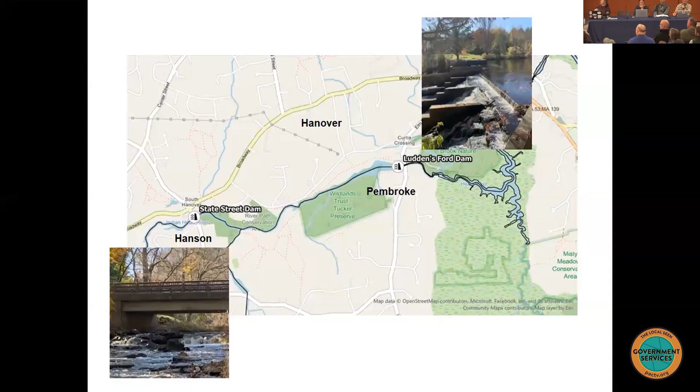So the goals of the Indian Head River Restoration Project, or IHRR, are to restore native fish habitat, to remove aging infrastructure. You see in this slide a lot more built infrastructure up at Ludden's Ford Dam than we do down at the State Street Dam. We want to look at reducing liability for dam owners. In this case, the towns are the owners of these dams - Hanover and Pembroke own the Ludden's Ford Dam, and Hanson and Hanover own the State Street Dam. We're looking to improve water quality, aquatic habitat, and natural riverine processes, eliminate ongoing maintenance associated with the dam and fish ladder, and increase resilience to climate change. These dams were not built to withstand the weather of today and the future.

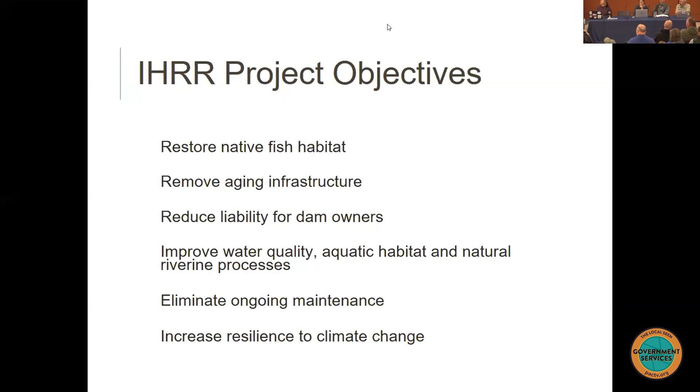So why dam removal, and why now? This started back in 2016 when the Ludden's Ford Dam had a phase 2 inspection report completed, and the result was that the dam was in poor condition. The town of Hanover, and I believe Pembroke as well, started having conversations about putting money towards repairing the dam. And it was a Hanover resident who said, well, what are we using this dam for? Should we look at repairing it, or should we look at potentially removing it, reconnecting the river, and restoring habitat? So that's when the Watershed Association became involved.

So these two dams are two of 3,000 dams in Massachusetts. About 50 are currently used for flood control, another 50 for licensed hydropower, and another 100 as reservoirs. Now these two dams that we're talking about - they're not used for flood control, they're not large hydropower dams, and they're not drinking water supplies.

So they fall into that other group of about 2,800 dams that really serve no purpose anymore. The industries they were built to support no longer exist, and so what we're seeing now are the negative impacts on the rivers and habitats. Across Massachusetts, across the country, and even across the world, organizations and governments are starting to remove dams.

This slide shows MassDEP's Department of Ecological Restoration project map. You can see in purple the completed projects, dams that have been removed. All the red are active projects, and the yellow are culverts. That's another thing we can do to remove barriers.

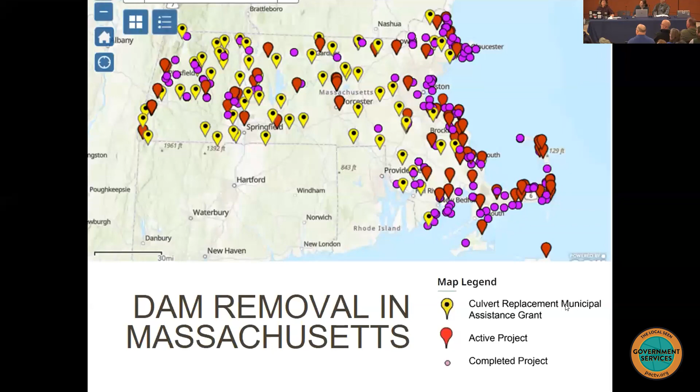Thank you, Alex. Remove barriers along the rivers. The problem with barriers along the rivers, once you lose those industries they were built to support, as I mentioned earlier, we have these negative impacts of the dams on rivers. This is a slide some of you may have seen before at earlier presentations, but let's quickly go through these impacts.

First, when you put this structure, right where the pole is, in the middle of a river, you turn that free-flowing river into a series of disconnected ponds. That blocks fish passage, so you can see the fish down there. We have our anadromous fish here in the Indian Head River, our river herring and American shad, that need to go upriver to find suitable spawning habitat but are blocked from doing that by these dams. We also have our eels and brook trout that use the river for passage and can't do that with the dams.

These ponds behind the dams are impoundments, just bodies of water that sit there, so the water temperature increases. That has all sorts of impacts on water quality, both lessening of oxygen and increasing algae, and it makes it a really difficult place for those animals and plants to live.

And then finally, you can see that yellow bar on the left there - traps. The dams can trap sediment behind that structure, which covers up the riverbed that can be used as habitat, and it can also increase concentrations of contaminants in the water body itself.

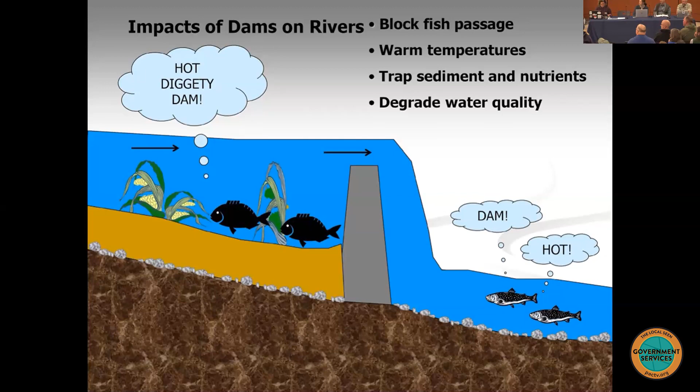The other reason we're looking to remove these dams now is because we have funding, through this phase of the project, through MassDEP's Natural Resource Damages Fund. This fund was put together to restore habitat that was impacted by contamination upstream at the fireworks site. This money can't go toward cleaning up the fireworks site, it can't go towards dam repair - it can only go toward habitat restoration.

I mentioned the fireworks site, just to address the elephant in the room, at least for some of us, which is the potential designation of that site as a Superfund site. What we know is that whether or not that area is designated, makes it onto the NPL list, or is designated as a Superfund site, that's not really going to affect the mechanics of these dam removal projects. What you'll hear Sondra present in terms of how the dams will be removed, what they'll look like after - none of that will change as a result of the potential Superfund designation.

What will change and be impacted is the timeline, as we try to understand if the potentially responsible parties upstream are deemed responsible for the contamination we're finding in the contaminated sediment behind Ludden's Ford Dam, which Sondra will speak to quite a bit.

I just want to close my section by reminding everybody we're here to talk about these two project sites - the potential impacts of removing Ludden's Ford Dam and the State Street Dam. We're not here to talk about the factory pond site, we're not here to talk about potential Superfund designation, and we're not here to assign blame to anybody upstream. We're here to hear the data presented by the consulting team and then make a decision with you, the dam owners, on what you want to do with these sites.

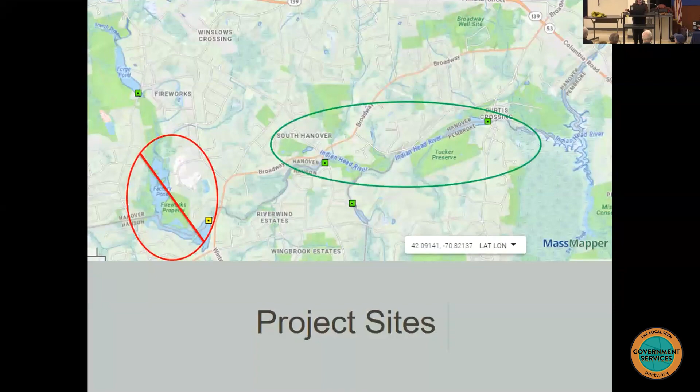I'm going to turn it over to Sam now to talk a little bit about the Watershed Association's perspective. Thanks, Becky. I'm just gonna - unless you can't hear me. Can you hear me in this thing? Yeah? I'm pretty loud anyways. You're not loud enough?

Sam, the camera's also facing the top. Oh, okay, I'll get up. I think Sondra's not going to. I'll get up. Okay, all right.

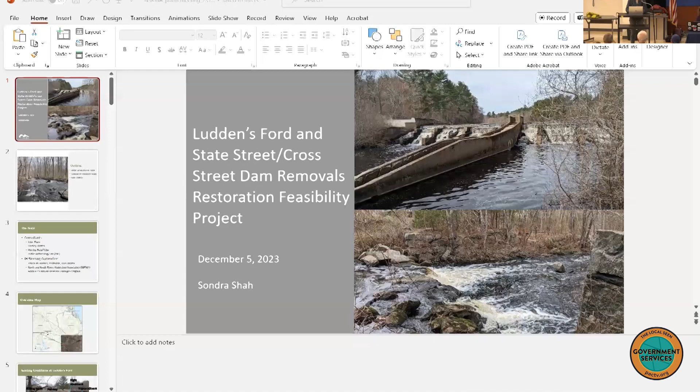All right, thanks for coming here today. My name is Sondra Shah. I'm an engineer with Inter-Fluve, and today I'll be talking to you about the Ludden's Ford and State Street Cross Street Dam Removals Restoration Feasibility Project.

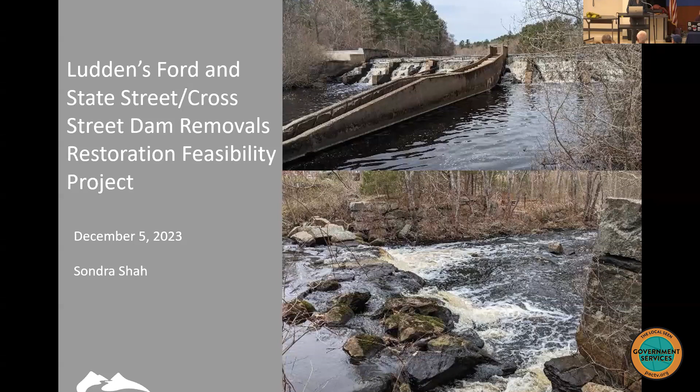We are here today because we have two dams that no longer serve a purpose. Along with preventing fish passage, they disrupt the natural temperature, sediment, and flow cycles of the river. They also pose a safety risk and liability for the towns. In this presentation, I'll talk about the feasibility of removing these dams, first discussing the work completed by the team, then the findings of the study with help from Neil at Horsley Witten, and then I'll give two case studies of completed dam removal projects.

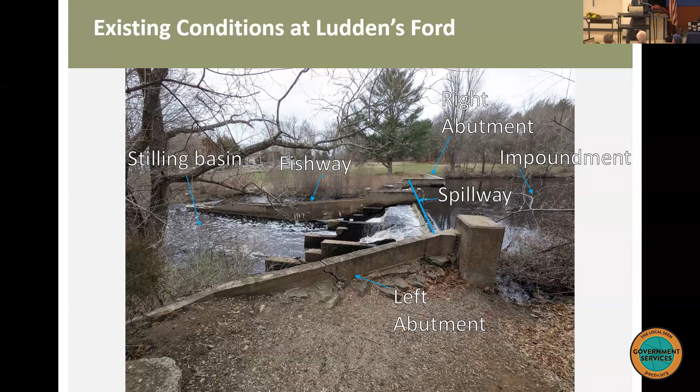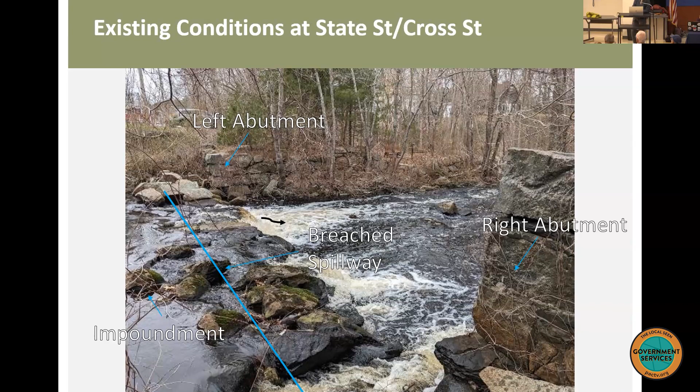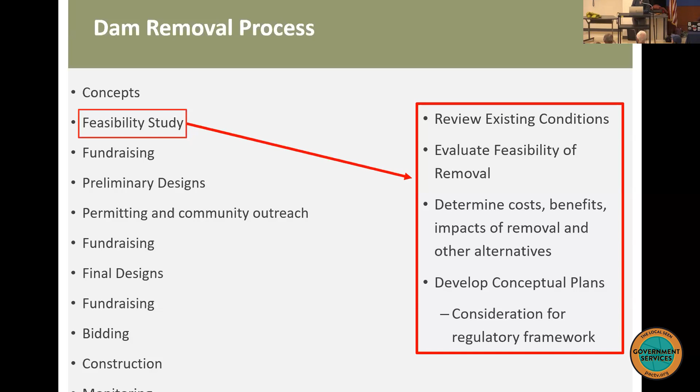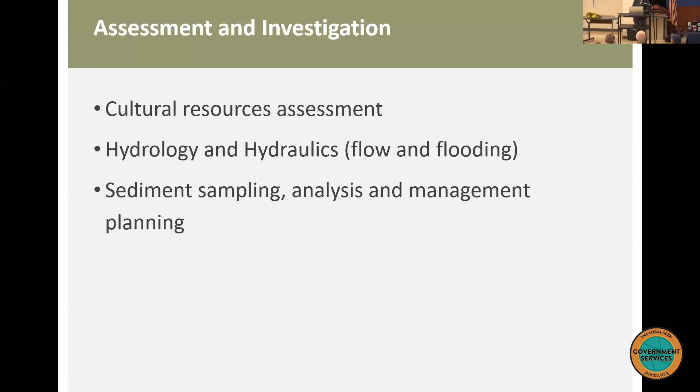Understanding the history helps us understand the current state of the dams and surrounding area, and informs us of anything else we need to be aware of as we design removal. In partnership with the tribes, we learned how meaningful this section of river is.

Migratory fish runs were staples to the Native American subsistence way of life and still play a major role in the culture. In the 1980s and 1990s, archaeologists from a nearby university discovered Native American artifacts on either side of Ludden's Ford Dam, both on the Pembroke and Hanover side. These findings give further evidence that this was a site where Native Americans congregated.

Starting in the late 17th century, European settlers began harnessing the river for a whole range of manufacturing industries. So the river saw a sawmill, grist mill, carding mill, tack and nail factory, ironworks forge, and a rubber plant.

Based on these cultural assessments, both sites are characterized as having high sensitivity for pre-contact Native American cultural deposits and post-contact industrial archaeological resources. The archaeologists we worked with from PAL did note, though, that the dam removals will have no effect on historic architectural resources, provided measures are taken to protect the Elm Street Bridge.

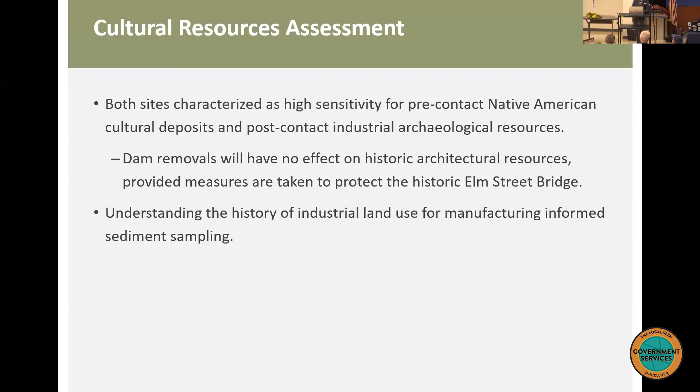The 2-year event means there's a 50% chance of that flood occurring in any given year, whereas the 100-year event has a 1% chance of occurring in any given year. So it's much more rare to see a 100-year event, but it has a 1% chance of happening.

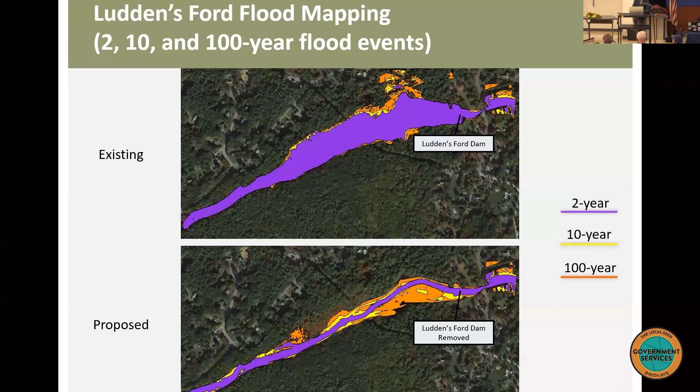So the overall takeaway here is that the dam removals will not worsen flooding downstream. The dam removal will reduce flooding around the Ludden's Ford Dam, and the dam removal eliminates the risk of flooding due to dam failure.

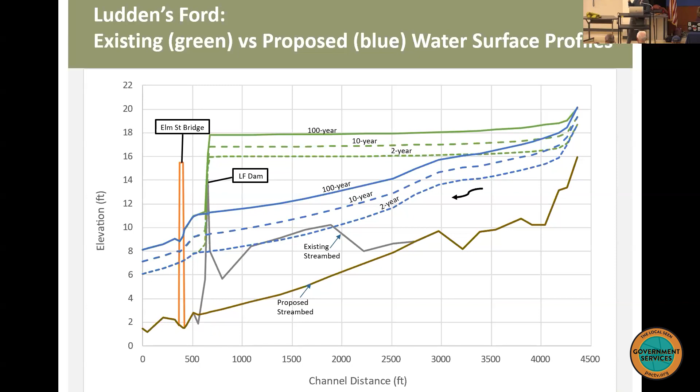So the green is existing and the blue is proposed. You see the biggest drop in flood profiles around the dam, and then there's less of a decrease as you move upstream. Feel free to ask me questions about that later.

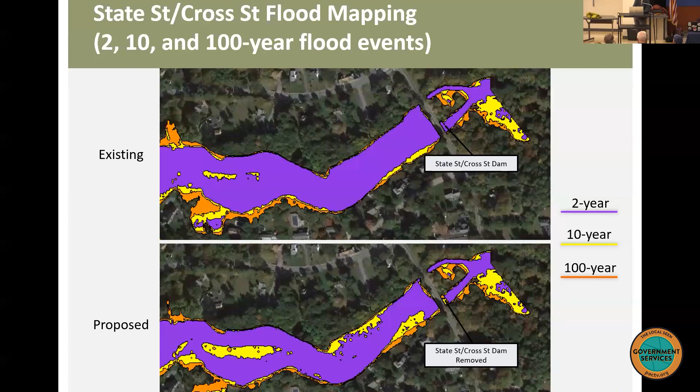And then here we have the same profile for State Street, Cross Street Dam. Like I said before, there's not as big of a difference between the flood profiles, but you do see a decrease. I also want to note that we looked at the velocities during the migration season to make sure that fish can pass upstream successfully.

And we also looked at velocities during big flood events to ensure that removing the dams don't pose any risks to infrastructure nearby.

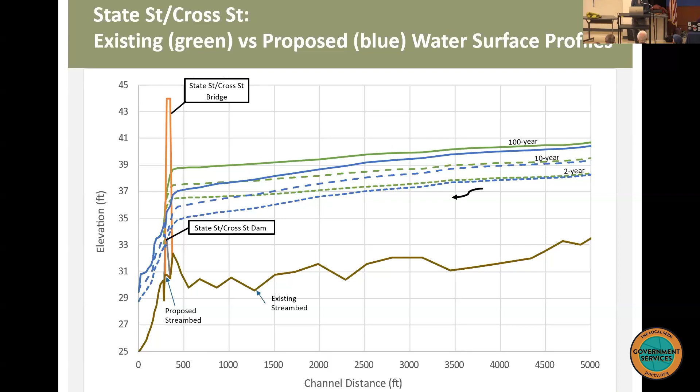So we often locate our proposed channel in the location of where we think the former channel might be. This kind of map also is important to estimate sediment quantities behind the impoundment.

And we didn't create a similar map for State Street because we found that it was mostly coarse sediment behind State Street, suggesting that most of the fine sediment was evacuated downstream when the breach occurred.

And now I'm going to hand it over to Neil to talk about the sediment sampling.

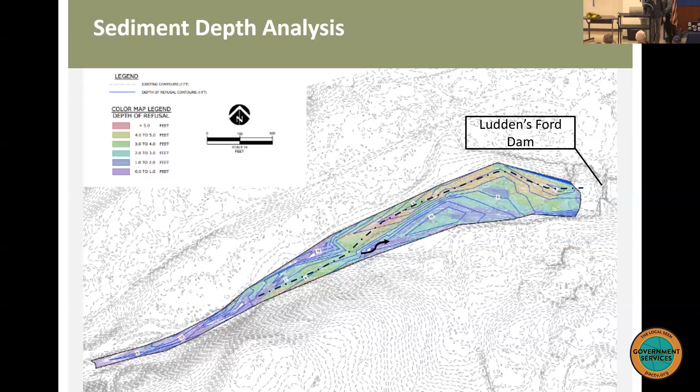Thanks, Sandra. Good evening, everyone. Pleasure to talk to you tonight about the sediment portion of this project. For every dam removal project, sediment is one of the driving factors that we need to look at carefully.

Perhaps most frequently one of the most important ones for what the cost of the actual removal may be. So like all of those, we looked at this carefully here. We developed a sampling plan for both impoundments based partly on what we call a due diligence review.

And what a due diligence review is essentially a review of the historical records of what might have gone on here in the past to give us a clue of what kind of contaminants might have been contributed into the river as a result of those past activities.

So we actually use a for-pay service. You give the money and they give you back a report that has a whole bunch of aerial photos, historic aerial photos, historic maps. Very significantly, these things called sanborn fire insurance maps, which existed for many years going back into the 19th century, that companies had to pay for.

So it tells you what kind of building was on different lots, so we could see what sort of manufacturing facilities were present there. Based on that, we of course knew that there was a lot of manufacturing.

There was a railroad bed that ran across Ludden's Ford, which has its own set of contaminants associated with it. Based on that, we developed a set of parameters that we wanted to sample for. These are what are called the MassDEP 401 Water Quality Certification Regulations. That's a mouthful, but what that means is those are the regulations that govern how sediment can be managed in Massachusetts, so we had to follow those. There's a set of specific parameters you have to sample for to meet those requirements, and then we also added additional parameters based on this due diligence review targeting the industrial uses of the land.

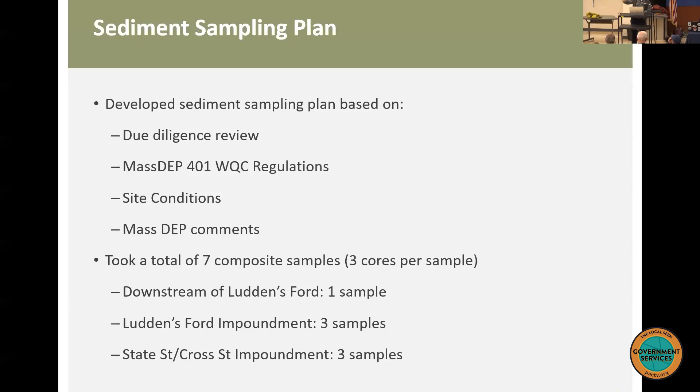The results for the key things are shown here. We have lead and mercury shown because these were the 2 metals that exceeded the regulatory thresholds we have to look for - not in every circumstance, but in some. All the other things we sampled for came up as non-detect or below all the regulatory standards. So lead and mercury are what we're going to talk about here, both at this site and at Ludden's Ford.

These results are shown, and S1 stands for Soil Standard 1 - that's MassDEP's regulations for soil. There are 3 criteria, or 3 groups: S1, S2, S3. S1 is the most stringent of the three possible. S1 is in play when people have a chance to come in contact with said soil. I also should point out that these standards I'm talking about, these MassDEP S1 standards, are for soil.

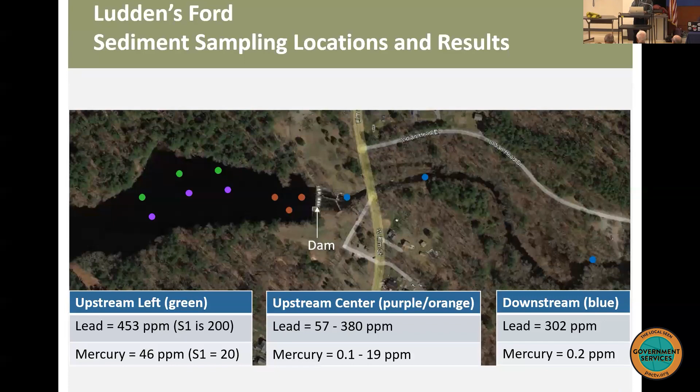So if we look at the upstream purple and orange versus the downstream blue, the lead numbers are very similar. So what that's saying is that if this sediment were to be allowed to move downstream passively on its own post-dam removal, the receiving waters have about the same concentrations already as what's upstream. So that reduces the concern about doing that. Mercury is a little different, so that needs to be thought about some more. And of course that river left area is a little higher. So we'll talk a little bit about potential alternatives for managing the sediment next.

Before we get to that, we'll give a little bit more of a summary. So we have 4 of the 7 samples that went to the laboratory had either lead or mercury that exceeded those MassDEP S1 standards, generally somewhere between 1 to 2 times those standards. So not horribly over, not by orders of magnitude, but over.

And then there's another set of standards I haven't talked about yet, called ecological screening values. Instead of being based on human health, those are based on ecological health to the environment, and those concentrations are lower. All of our samples exceeded those screening level values for the ecological thresholds.

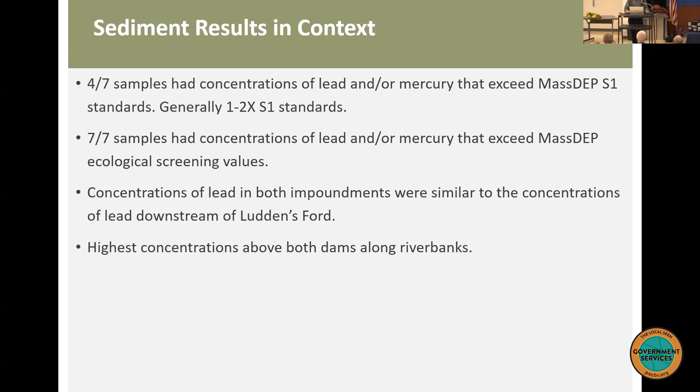As I mentioned, the concentrations of lead in both impoundments are similar to the downstream concentrations, and the highest concentrations above both dams are along the riverbanks. And again, that's critical because post-dam removal, the riverbank areas are the least likely to have that sediment move downstream, as opposed to the stuff in the center of the channel.

A lot of people want to talk about the factory pond contaminant site. So just for perspective, our concentrations of mercury are between one third to half less than what was found upstream in factory pond, and between 50 and 95% less for lead. So the concentrations of these two metals are significantly lower for these two impoundments as compared to the actual regulated contaminant site upstream at factory pond.

And lastly, before anything happens, a bunch more sampling will need to be done to inform all of the potential management options and how this might proceed going forward.

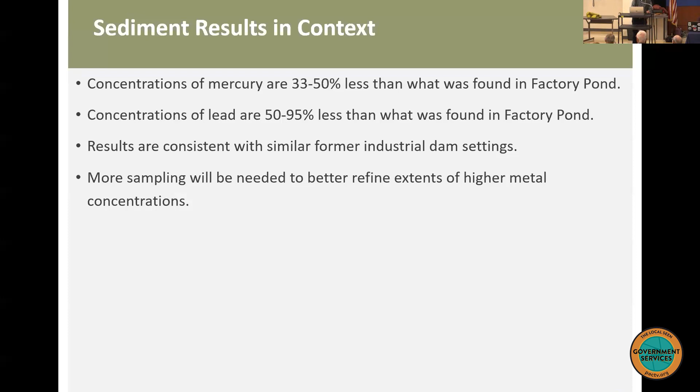Starting from the easiest is passive downstream release of all the sediment. That's obviously the cheapest—there's no digging it out, there's no moving it. Probably unlikely to happen because we do have some exceedances.

Then we have partial removal. This is where you would target—and again, this is where the more sampling comes in—you would do more sampling to target where the highest areas of high metals are and try to remove those. Also try to remove the areas to create your channel, so that instead of letting nature and chance dictate which sediments will migrate post-dam removal, you define where the channel is going to be, and you remove those sediments so that you're targeting those areas.

The sediments that you remove can be either put on site, stored on site, capped with clean sediment, or shipped off site. What's important here is that in the state of Massachusetts, landfills won't accept soil that exceeds those S1 standards. So we would have to make sure that whatever portion was going to a Massachusetts landfill was below those standards. Anything above it that were to go off site would have to get shipped to an out-of-state landfill at very high cost. So if that volume is high, it drives the cost of the dam removal to a very high level.

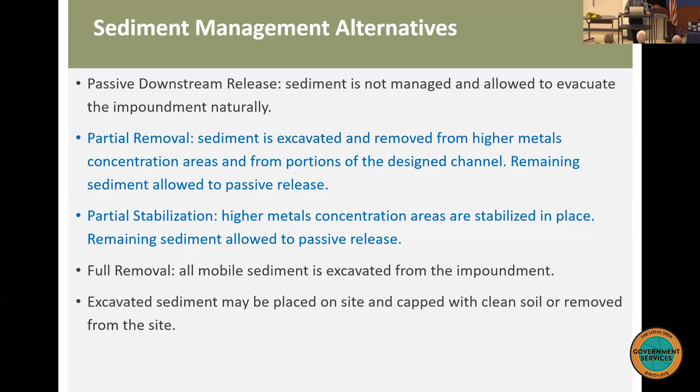And I turn it back to Sandra to take us from here. I'm sure you'll have questions on this, but we'll get to the questions at the end.

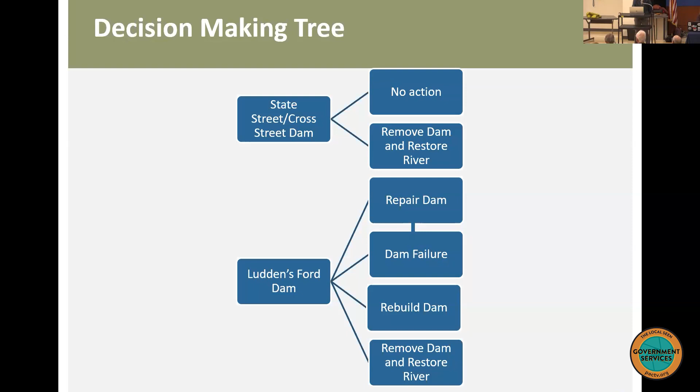Okay, so these are our paths forward for these dams. I'll go over the pros and cons of each one, but I need to back up. For the State Street Cross Street Dam, there's really no other options other than leaving the dam in place or removing the dam and restoring the river. Whereas for Ludden's Ford, there's repairing the dam, there's a possibility of a dam failure, there's completely rebuilding the dam, and then there's removing the dam and restoring the river. So I'm going to focus on those four options in the next few slides.

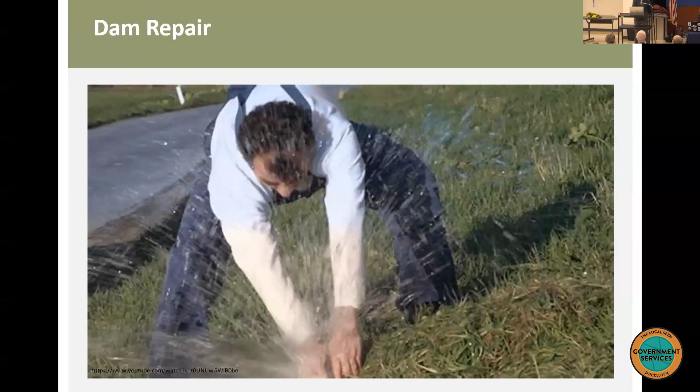So here's dam repair. I like to think of dam repair as a temporary solution to address immediate issues or risks, but not necessarily the best long-term solution. It's a quick fix. It keeps flat water recreation, but other than that, there's not many pros. I guess if you like the aesthetics and you like to canoe and fish on the pond, there's that as well.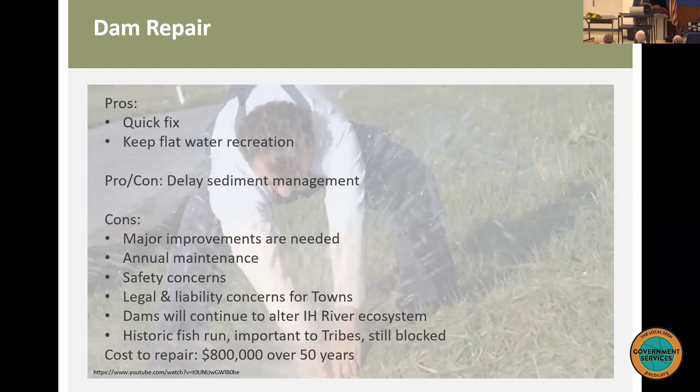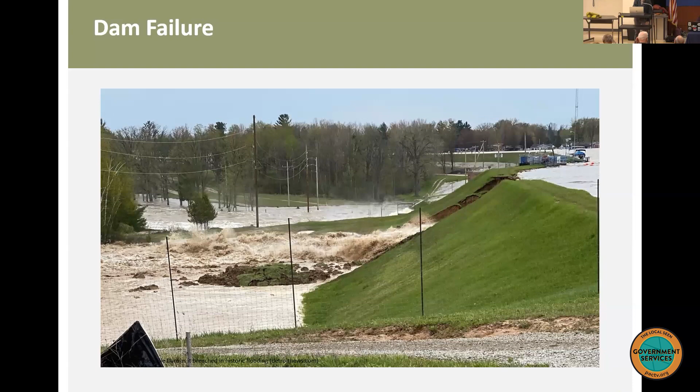And then there's dam failure. Repairing the dam, that kind of Band-Aid fix, could still lead to a dam failure, especially if those dam repairs don't happen in a timely manner. We know that Ludden's Ford has uncontrolled leakage and advanced decay of concrete. If the Ludden's Ford Dam did fail, there would be an uncontrolled release of sediment, and there would also be a disturbance to sensitive archaeological materials. The cost for this is unknown, and it would depend on the damage caused, but we're seeing these types of things happen more and more with aging infrastructure, failing with large rain events and increased flooding. So this would be kind of worst case scenario.

And then there's the dam rebuild option. Pros would be that you would be rebuilding the dam correctly to today's standards, and you'd be reducing a lot of those safety concerns. The cons would be the towns would still own the dams and still have that kind of legal and liability issue. There still would be annual maintenance. The dams would continue to alter the Indian Head River ecosystem, and the historic fish runs would still be blocked. And this would be a really expensive option. Concrete's really expensive, and we estimated that to be around $4.7 million. And that's money that funding isn't dedicated towards yet. That would come from towns or state or federal money.

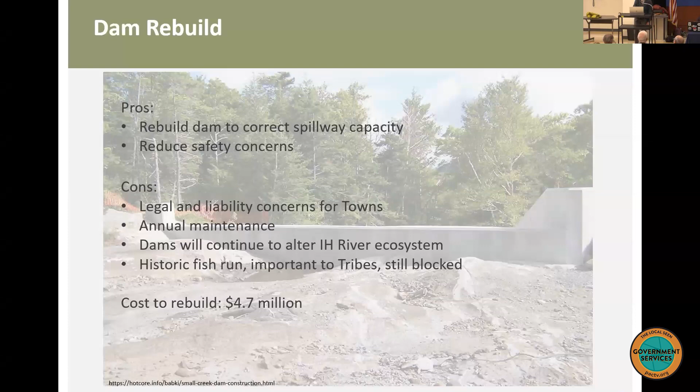And then we have the dam removal and river restoration option. Again, sediment management's kind of in that pro-con middle category. It's a complicated thing to address, but it's been done, and it is an impact of having these dams in place for so long. Pros: you're improving aquatic organism passage and habitat, removing safety concerns, removing legal and liability concerns for the towns, improving water quality, and promoting recreation supported by an uninterrupted river. When I was out surveying, I saw a bunch of kayakers put in downstream of State Street Dam, and I asked what they do when they get to Ludden's Ford, and they said they had to portage. So this would be a good thing for them. And then you're also restoring natural hydrologic and sediment regimes. The cost for restoration, we estimated there's a pretty big range, so we did the low end and the high end. It'd be $2 to $5.6 million, depending on sediment management decisions and future sediment sampling. With future sediment sampling, we would be able to find hotspots of contamination that would really cut those costs down. And that's typical of a lot of dam removal projects in Massachusetts.

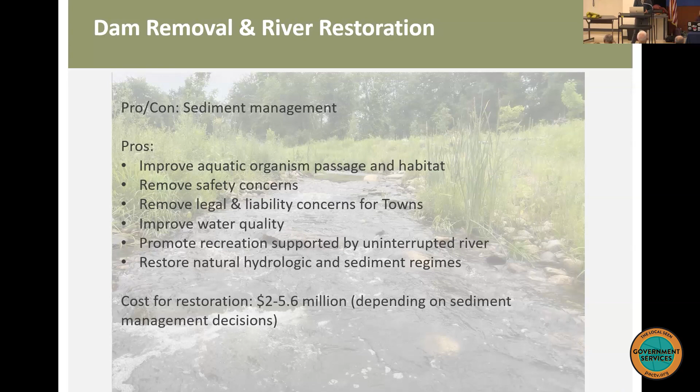Horsley Witten came up with these conceptual renderings to look at before and after pictures of each site.

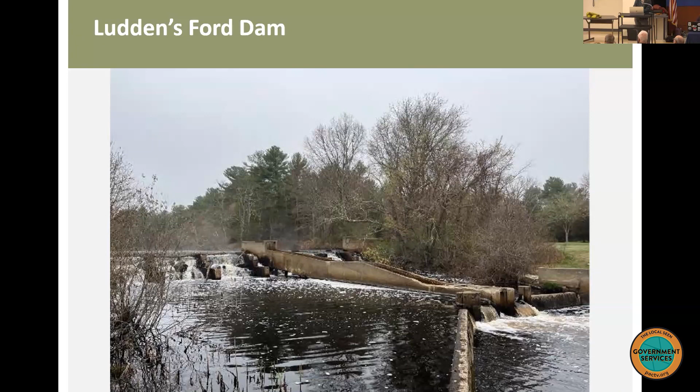Part of the Ludden's Ford Dam removal and restoration, part of the actual construction we would propose, is protecting those sensitive areas, putting matting down and fencing down for the excavators and trucks, removing the dam spillway and the right abutment.

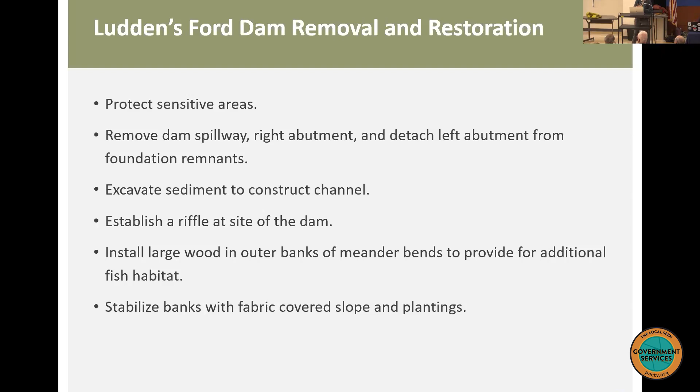The left abutment we would have to detach from the foundation remnants of the old industry buildings. We would excavate the sediment to construct the channel, establish a riffle at the site of the dam, and install large wood in the banks to provide additional fish habitat and stabilization. We would also use fabric covered slope and plantings to stabilize those banks as well.

Here is a plan view image of the planting plan. It's hard to see, but there are different zones for planting, and the tribe helped add some culturally significant plants to this list as well. So there's a wetland zone, a transitional zone, and an upland zone.

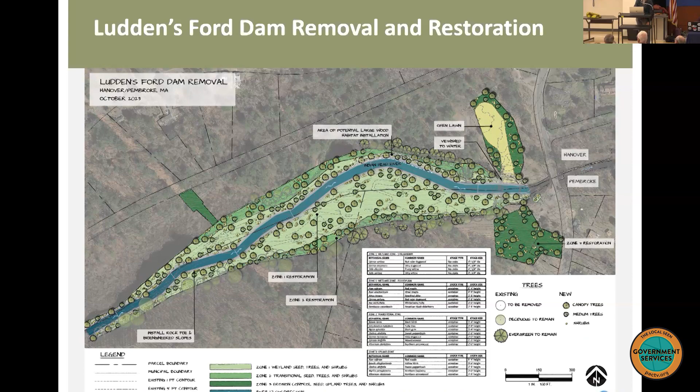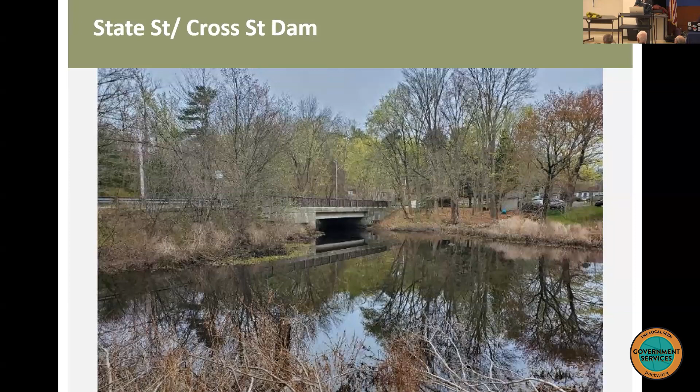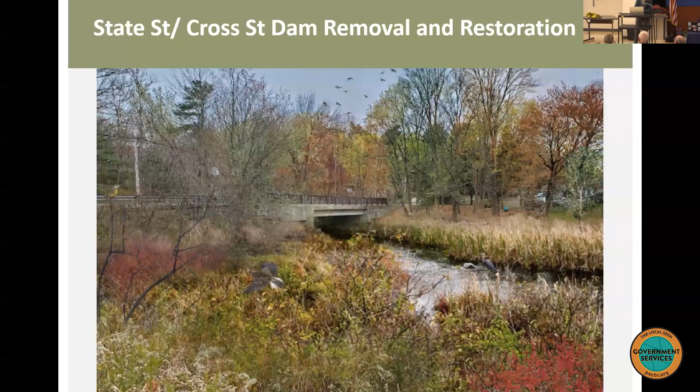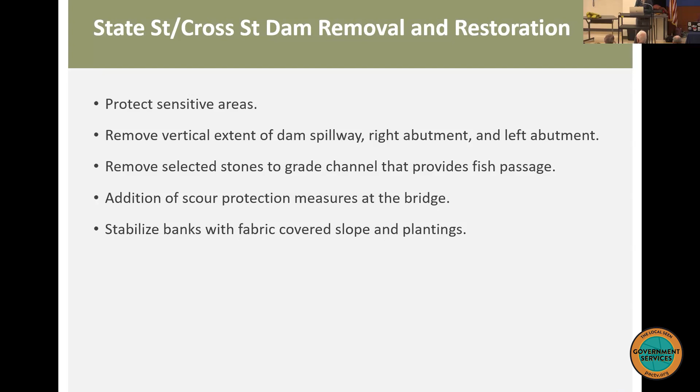Part of the State Street Cross Street Dam removal construction would involve protecting those sensitive areas, removing the vertical extent of the dam spillway and the right and left abutments, removing selected stones to grade the channel that allows for fish passage, adding scour protection measures at the bridge, and similarly stabilizing the banks with fabric covered slope and plantings.

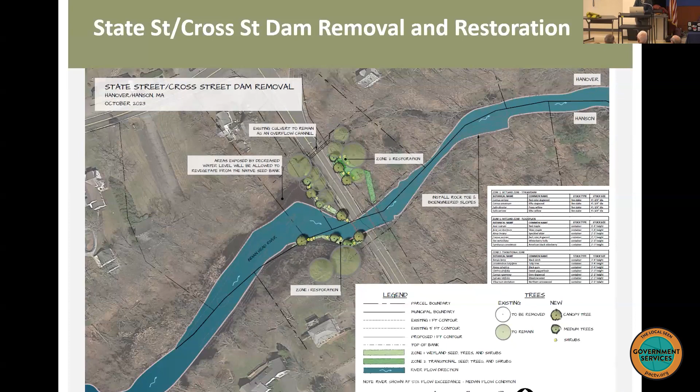Here is the overview map of State Street Cross Street. There's less of an area that's impacted, so it'd be a much smaller project than Ludden's Ford.

Now I'm going to talk about two case studies. The first one is on the Mill River in Taunton, Massachusetts. The Mill River used to be severely dammed and is no longer. This work started in 2007, and we still have monitoring going on today.

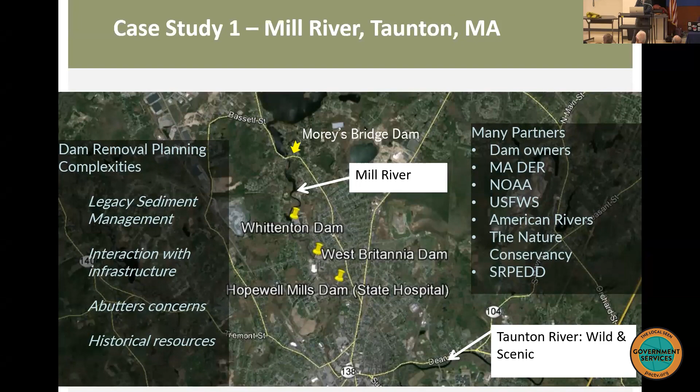There's a lot of similarities to our project. The dams were owned by different entities, the impounded sediment had varying levels of contamination, and there were also elements of the project that had historical value. There are nearby bridges that had to be evaluated for stability, and there were a lot of construction logistics because of the urban environment. So we're focusing on the Hopewell Mills Dam, or the State Hospital Dam.

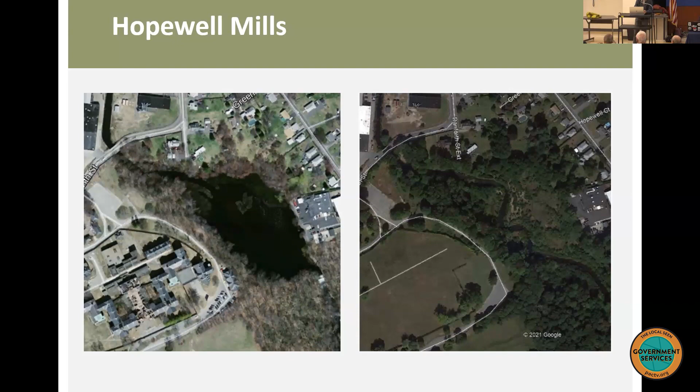On the left you have the impoundment pre-dam removal, and on the right you have the river post-dam removal. In the impoundment there were 14,000 cubic yards of sediment. Metal concentrations were similar to what we have in Ludden's Ford, and in addition to metals, they also had polyaromatic hydrocarbons.

For this project, they reused most of the excavated material on site. Based on the sediment sampling and many phases of the project, they were able to pinpoint a hot spot of lead, and they only had to remove 12 cubic yards of lead to an offsite facility. The rest of the sediment they were able to reuse on site.

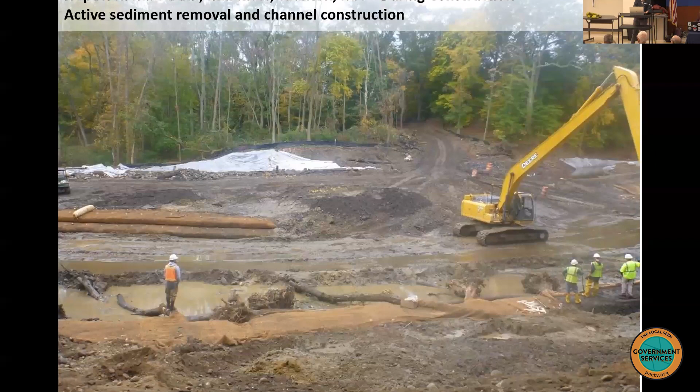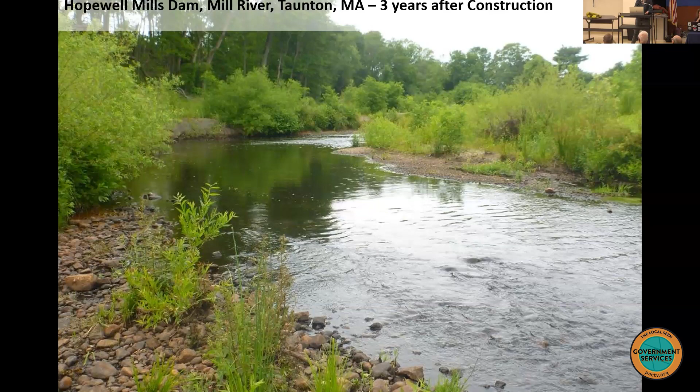Here's a picture during construction. You can see those fabric covered slopes to provide stability on the banks, and this is showing active removal. There's some large wood put into the banks for fish habitat and stability. And then here is the river post removal, three years after construction. This is the first migratory season after removal, and they saw a ton of fish come upstream, which was really exciting.

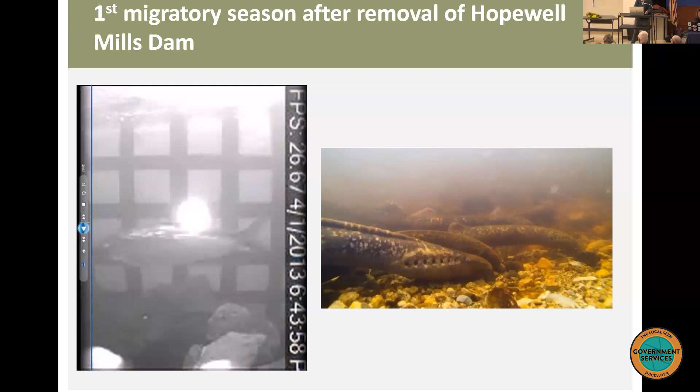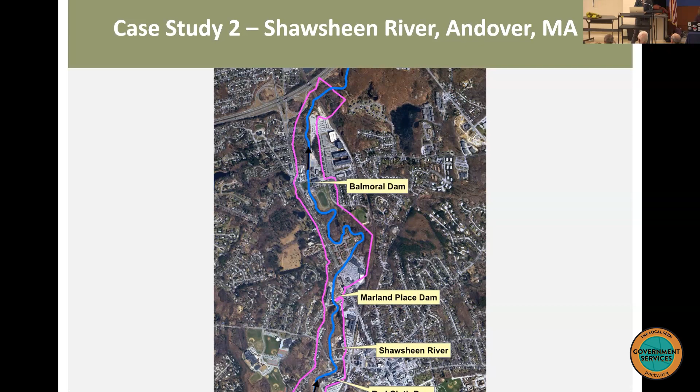The second case study is the Shawsheen River in Andover, Mass. We're going to be looking at Marland Place Dam, which is the second downstream dam. The river is flowing from the Red Cloth Dam to the Balmoral Dam. Here is the Marland Place Dam, highly urbanized, in between two buildings with a road upstream.

They found lead that exceeded human health thresholds, and it was actually higher than what we are seeing at the Ludden's Ford Dam.

That's it. Thank you for listening and coming today.

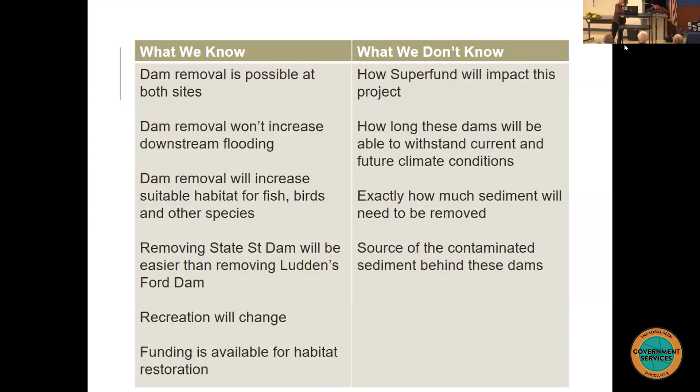So what do we do now? What are our next steps? I'm going to try to go to the next slide.

The next step is the towns need to make a decision about whether or not they want to pursue restoration at these sites—taking sediment off the table, because there's so much unknown around that. Do the towns and the dam owners want to pursue that as an option? Is that what you see as a vision for these sites? If yes, the Watershed Association can then try to get more funding to do additional sediment sampling behind Ludden's Ford and get additional consultation to understand what the costs will really be.

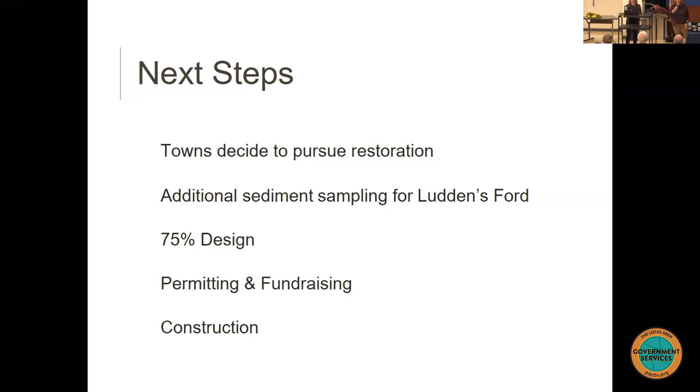So the North and South Rivers Watershed Association's mission is to protect our waters, and restoring our rivers is part of that work. We do that through citizen engagement and advocacy, and our role in this has been to provide a vehicle for getting the funding to answer some of the questions needed to understand how we could restore this river back to some health, and restore some of the species that have been harmed through the creation of this dam. So I hope that provides you a little bit of background.

We've done this before on a few other dams—we have 3 or 4 other dam projects we're working on throughout the watershed. You saw there were 3,000 dams in the state of Massachusetts. In our watershed alone, we have around 60 dams that we know of. They're prolific, they're everywhere, and unfortunately they're kind of just left-behind legacies of the past industrialization we had in our area.

Becky, as a steering committee member: I've been on the steering committee for the last year or so, maybe a year and a half. When I joined, I was a member of the Pembroke Select Board. I joined the committee because I had seen some dam removals and was interested, but I didn't have very strong feelings about whether it should be removed or not. I've passed by that dam—it looks pretty, I've enjoyed walking around it, I see people fishing there. Why mess with it? I needed to be convinced.